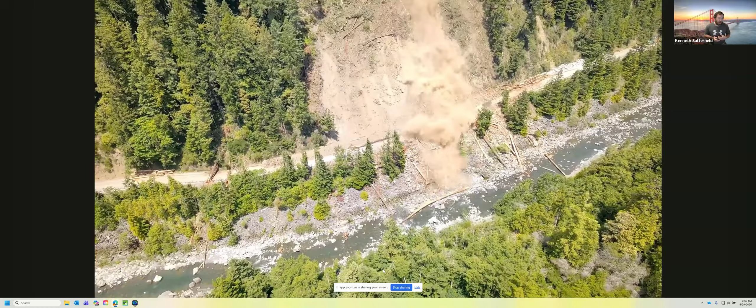So we ended up needing to do some additional work to try and get this safe enough for our geotech staff to go up. We actually hired out a helicopter logger and had that area scrubbed, pulled trees down in that area. I had the luxury of monitoring that site and showing that tree fall.

With our scan that we did, we were only able to collect to visual line of sight under part 107. So we were unable to collect the additional scarping that's about 800 to 1,000 feet up the slope, which led us to hiring out helicopter LiDAR.

We were able to schedule that through Frontier and have that turned around in about a week, so that way we could get out on site and work with the temporary restoration to try and get one lane of traffic going back through here. This had the road closed for about 2 to 3 weeks while we were trying to get this safe enough for people and traffic to work underneath.

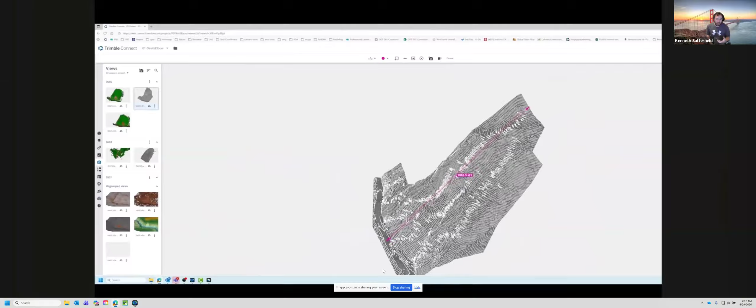After we completed this scan, we also loaded this up into Trimble Connect, and that's how this was passed along to our geotech for initial scarp review to see if we collected sufficient data. We collected about 1 square mile of LiDAR data in about 20 minutes.

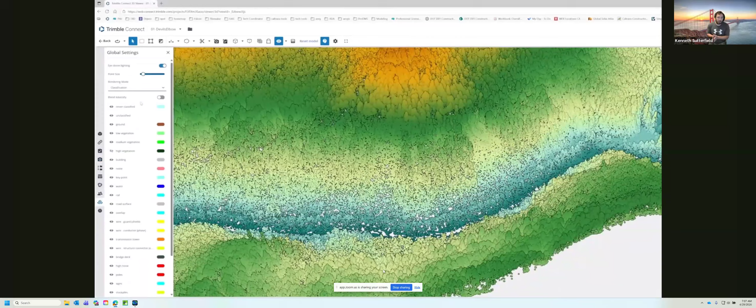This was handed over to our survey teams, and our survey teams were able to go through and do their normal extraction process and provide that to the geotech for full evaluation for design considerations. So not only did Connect help us get this as an immediate review, but it also helped us transfer this large data set from the vendor to the geotech, to the surveyors, and to construction to be able to review all the information and to work with it as needed.

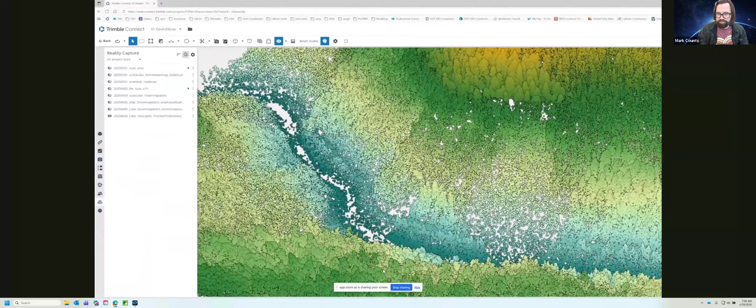Hey Ken, this is Mark Counts. So I think one of the things that we're finding powerful about Trimble Connect—why don't you tell our audience, our geotech team, how versed are they in using the Trimble ecosystem?

So most of our staff members don't even have a computer that can run most of the Trimble ecosystem. So they don't even have a computer that can run TBC. So if they wanted to load a point cloud and they wanted to operate this, they wouldn't have the technical capabilities or the hardware to be able to do this.

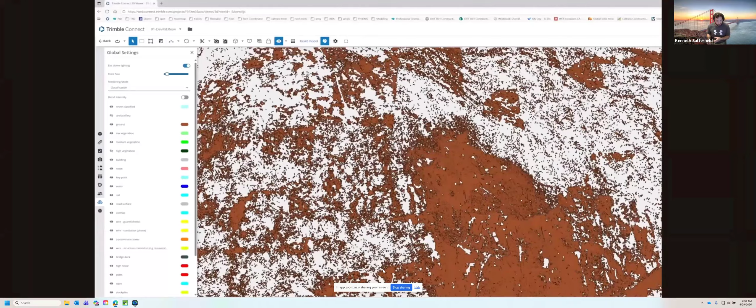So now the Trimble Reality Capture Professional Services, Trimble Connect, is actually democratizing this information to where it doesn't have to be processed down to where they can actually utilize it on the equipment that they have. So this has given us new deliverable prospects on how to get this information out.

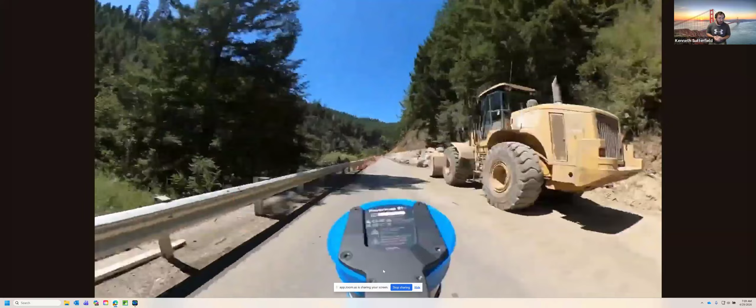And it's been multimodal. So we've been able to take these scanners, like in this particular case what you're seeing now, we took a Hovermap out and did a scan as essentially a mini MTLS and ran this back and forth to be able to get some basic information to try and keep track on this site.

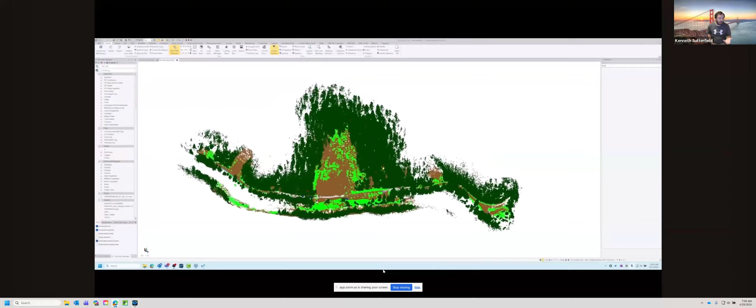All of this is loaded through that same workflow of passing it to our survey teams to get information to our designers and continuing through that workflow. Any georeferencing we're doing, our surveyors are coming out and setting the targets for it. In this particular case, we blended an aerial LiDAR flight with a ground-based vehicle LiDAR collection to be able to collect information about that.

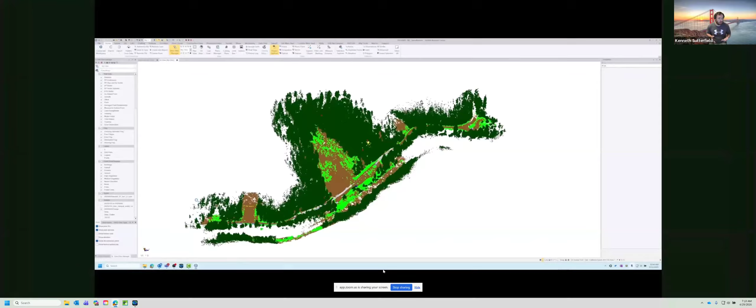The issue that we had at this location, and the partnership that we had with our surveyors, is there's very little diversity in this site. So trying to get control out was very difficult because it's all in the redwood forest. We can't get targets outside of that linear path of the roadway. So trying to find enough control that we can actually work with was difficult.

So that was one of the other partnering things that we did. We used Trimble Connect to help us see the site and try and come up with an aerial target plan that would be useful for surveys when they're requested to come out and do their work, and for construction to be able to continue to do regular movement monitoring.

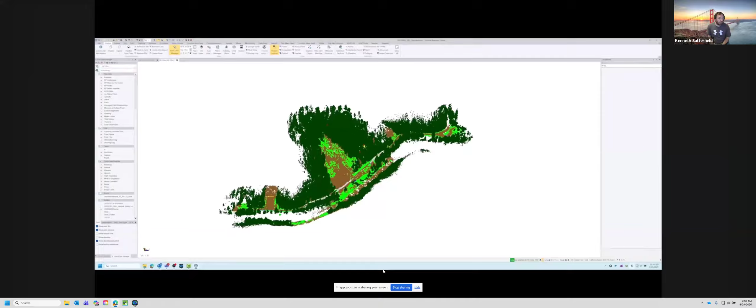I think, in case there's any surveyors on the call, let's address the elephant in the room here.

Sharing point cloud data with engineers, or even more challenging, non-engineer professions, is tricky. That's one of the things we love about Trimble Connect—beyond democratizing the data, it provides comfort to the geospatial professional at Caltrans, the surveyor, because once it's in Trimble Connect, it's a great viewer but alleviates concerns about misuse. That's a common concern for surveyors: if I share this point cloud data with someone not used to it, they might misuse it. Trimble Connect prevents all of that, doesn't it?

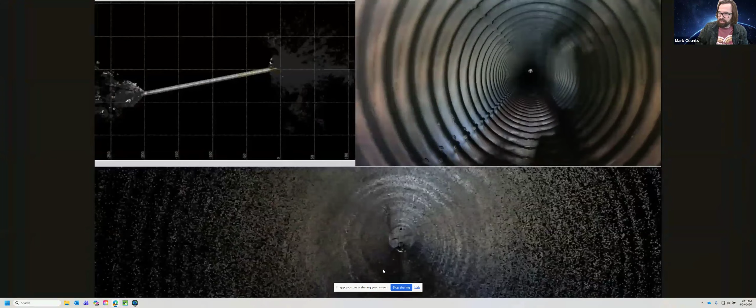Yes, because we're able to set access and download controls, and those restriction controls are getting more and more adept as time goes on.

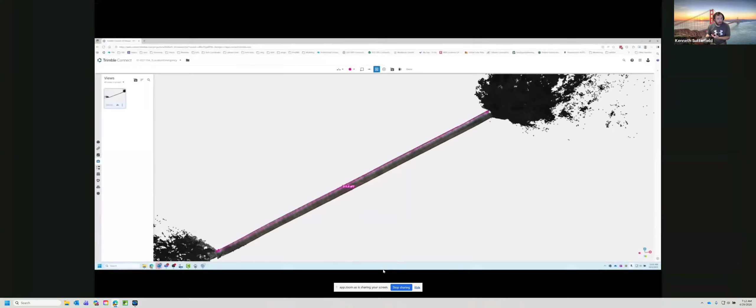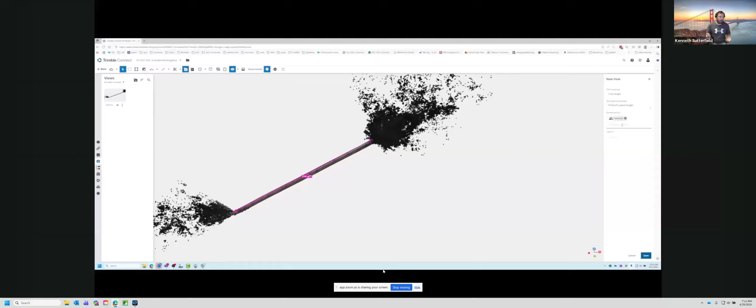With that being said, we have another example of how we've used Connect for culvert point clouds and data we weren't previously able to collect. That's been a major partnership with our surveyors, who go out and set control so we can georeference the scan off of. Since we have SLAM scanners and the terrestrial quadruped robot we can send down there to keep people out of it, we're now able to pair those two skill sets together and collect information we previously weren't able to.

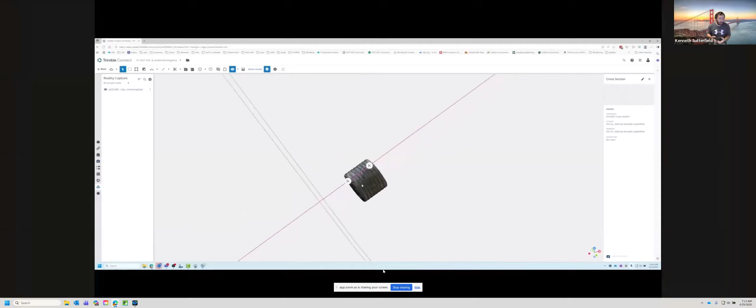One issue with this particular site was that the outlet wasn't accessible, but the inlet was. So we were still able to get length information, diameters, and condition of the pipe from one side, and get that onto plan sets for this emergency situation—all because we worked as a team. This was produced and handed to the engineers the same day, so they could look at it, pull the diameters, and check the condition, because this pipe was being considered for a liner.

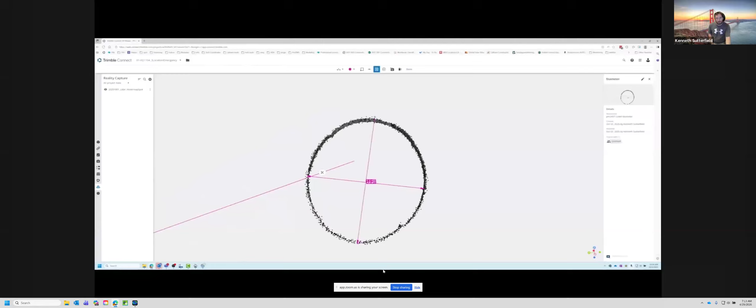That's been one of the big things we've used Connect for, to showcase evaluation. This is exactly how these point clouds are used, to take basic measurements you'd normally go out there, crawl through, and take a tape measure for. Instead, we're now able to use Connect to take the person out of the hazardous site, send a robot instead, and use it the same conventional way—to take essential measurements with a roller wheel, tape measure, or similar.

This can then be reused in the design phase—at least at Caltrans, for the surveyors to do their extractions and provide those to the designers with the level of scrutiny needed for reassurance that it's accurate.

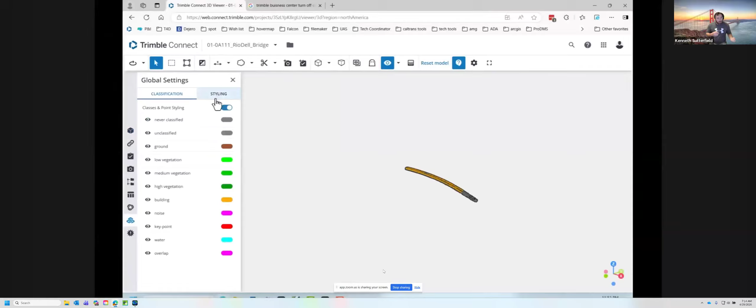Same thing here—we utilized Trimble Connect and robotic inspections to inspect the inside of bridge cells. We had a bridge replacement job where they had to remove utilities because they were changing the bridge type and no longer allowing natural gas to go through it. PG&E did their preemptive work and came back and told Caltrans staff that access was fairly poor in there.

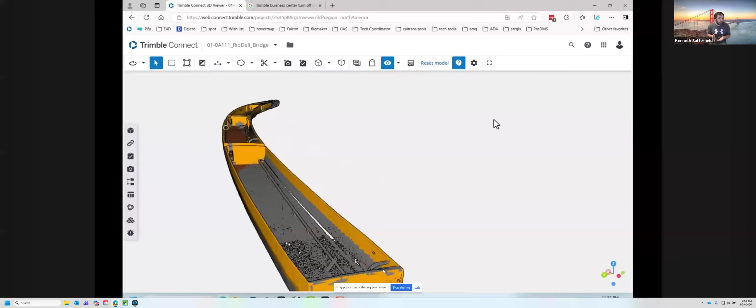As part of the design process for removing that utility conduit, we had to determine whether there was sufficient access. What happened was the lost deck used for forming and pouring the concrete had been stripped in the first two bays and pulled out by unsheltered individuals and used for firewood. However, in the third and fourth cells, they had stripped the lost deck but left it scattered all over the utility.

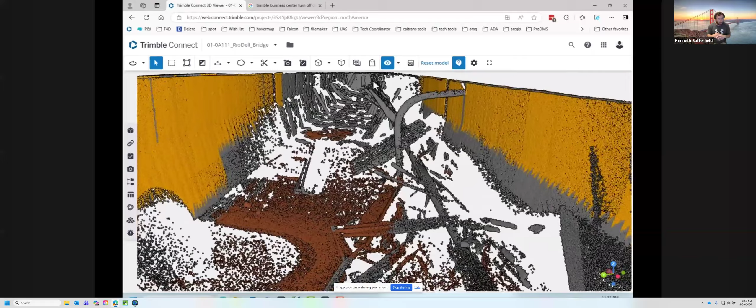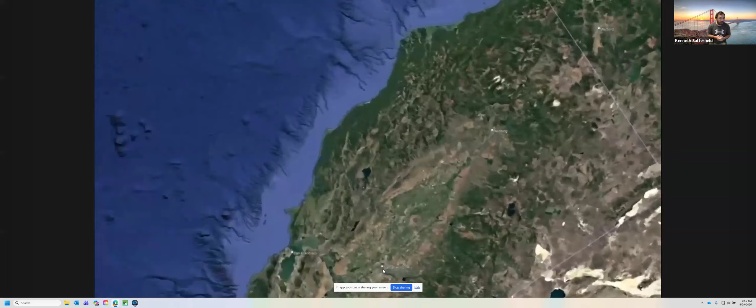So we were able to determine, without having to enter and get our confined space entry permits and do all the atmospheric testing, that we wouldn't be able to quantify this, and that we'd have to add additional funding to the contingency of that job to cover the extra work.

So another one of the use cases here, this was actually the first test case we had for using our Boston Dynamics Spot with the Hovermap to scan an area. We had a major sinkhole develop on US 101, and we were unsure of the location of the pipe in relation to a cut slope on the left-hand side. We were worried about destabilization from the excavation causing additional problems with the stability of the slope. We were also concerned with the depth of the pipe to make sure we didn't need engineered shoring.

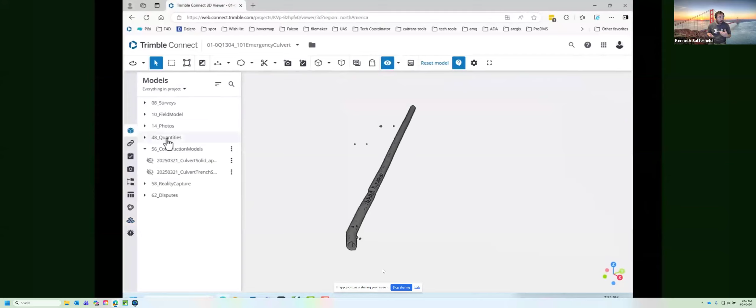So we were able to scan this and reference it from the work that surveys had done, but we weren't able to get alignment because of a buried dog leg. So surveys wasn't able to accurately determine center line above that without entering the pipe.

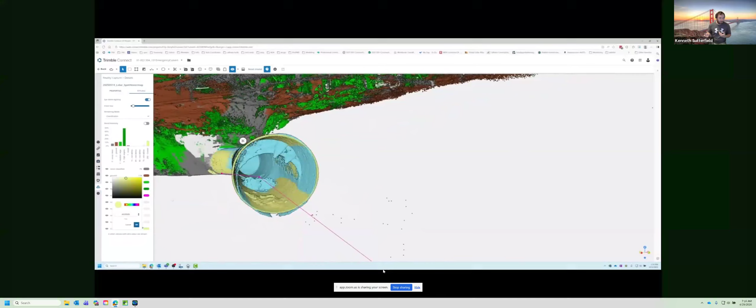So that's where this pairing came together, and we were able to showcase using the tunneling module and the issues with the pipe. We were also able to use the utility modules within TBC to model the required excavation, and we determined that we had roughly about a foot of spare room between the cut slope, the toe of the slope, and where the excavation was going to be.

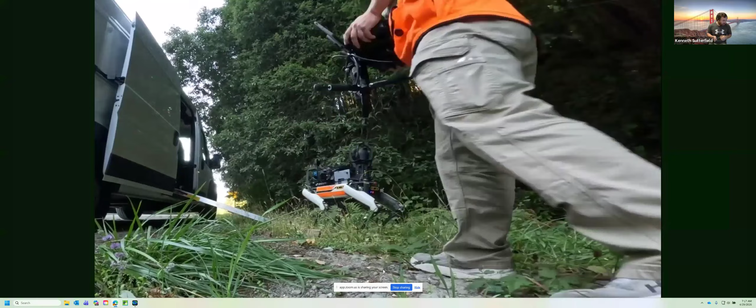And then we were able to do our as-built scan as well and reference the two of those together to show the difference between the replaced pipe and the originally failed pipe. So this was one of our first successes in using this system and showcasing that.

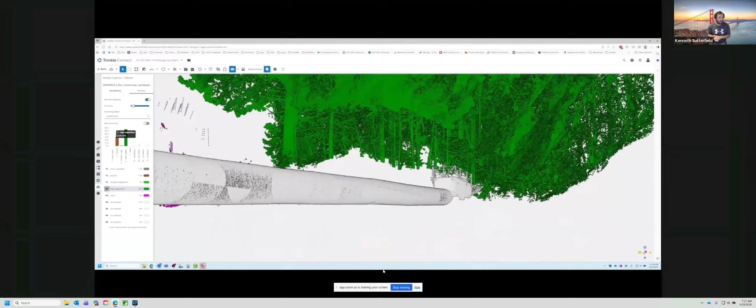We're looking at potentially continuing to use this as part of our asset management, where now we can store these tunneling module analyses of how true and round the culvert is and compare that from year to year, so we can do a subsequent scan and see if there's any new deviation in the pipe. Because one of the things we always run into with any culvert is they're not put in perfectly straight. So when you come back out five years later and it's a different person, you're always wondering, was that bend always in that pipe? Was that bow always there? Was that how we installed it? So now being able to store this, share this, and evaluate it with the tools available to us in the Trimble suite, we have a new way of assessing the health of our culverts.

So Ken, what do you mean by that when you say tunneling module? So tunneling module is an additional function within Trimble Business Center. It's not part of the normal suite.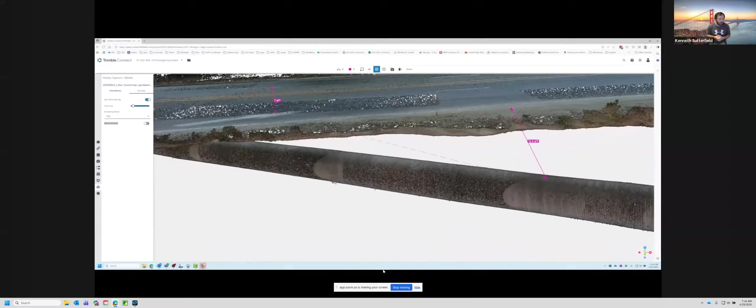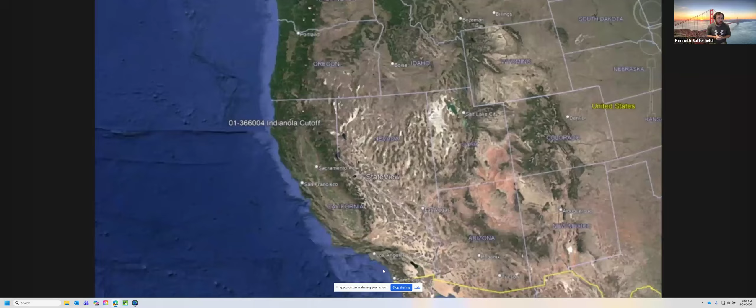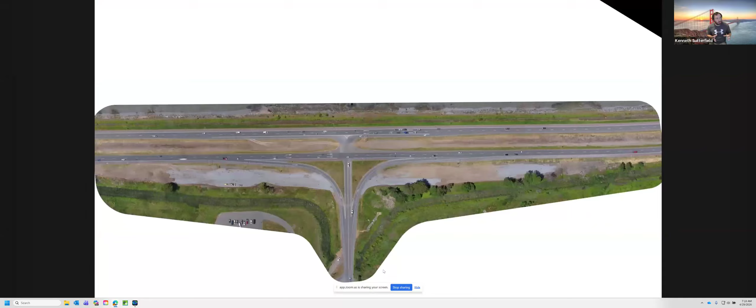They have the additional tunneling licenses, which is meant for the mining industry, which I believe Albert's going to cover towards the end when he's talking about it. But that adds additional tools that allow you to do analysis on tunnel shapes. The big one we're looking at with that is we can do a deviation analysis to see how true the culvert was installed, and we can look and see how round and true any cross section along that is.

Beautiful. So now we're moving on to some of our more regular bid projects here, where we're stepping away from the robotic inspections as much. This is where we were using Trimble Connect to bridge our field work and our discussions with the contractors. This particular job is putting an above-grade interchange in with an expanded polystyrene fill, lightweight fill.

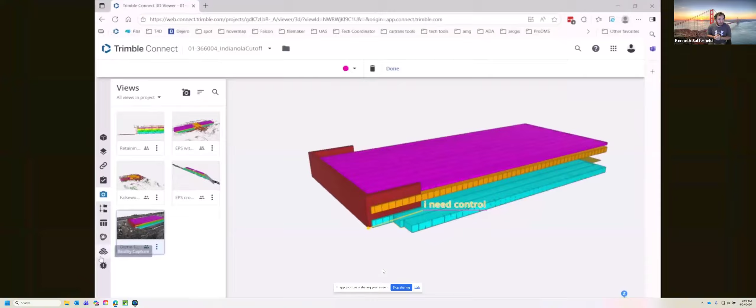Because of the bay mud, we couldn't have that much weight, so there's roughly 5,000 micropiles in a pile cap that goes underneath the EPS blocks. One of the discussions we had to have with the contractor was, how were these blocks laid out?

So part of what we did is we went into Trimble Business Center and used the ANZ toolbox to model all 5,000 EPS blocks and how they interlock together, as an example of what we were expecting to see from them. We shared this view with the contractors so they could have an idea of what our expectations were, so we could continue to have a more productive discussion on what their means and methods was going to be and what the acceptable overlaps and specialty cuts were.

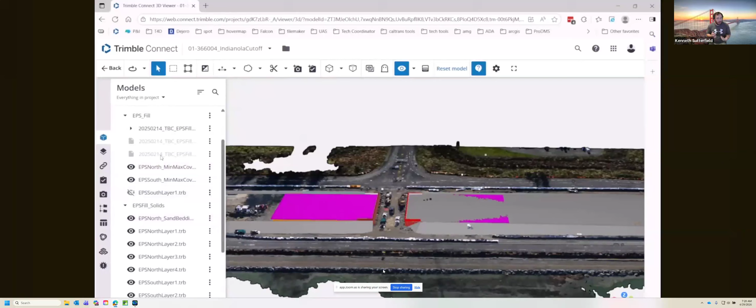We were also able to check and evaluate the minimum and maximum coverage requirements that were called out in the plans, and have a discussion with the designer when we found some discrepancies there.

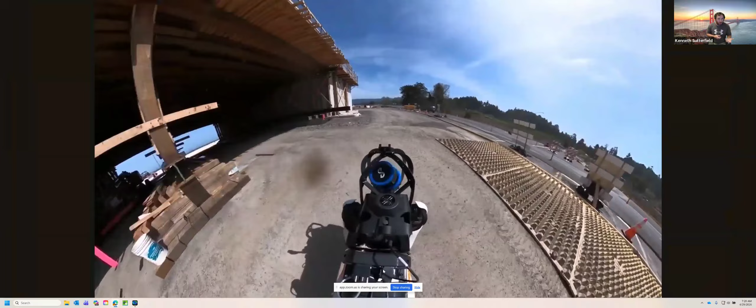Then once they had started work on the overpass, we were able to do a falsework inspection with a robotic platform, the same Spot Hover Map system we were using for our culvert inspections, to be able to do a scan of this without ever having to cross underneath the falsework, keeping ourselves out of that.

And we used the monuments left by surveys to be able to georeference that to our model, which you'll be able to see here in a little bit. The benefit of this is we were able to keep staff out of unnecessary inspection where there's some hazards. While this one had been poured in the use case where we were testing this out, it would normally be during a pour, which would be a much more hazardous time frame.

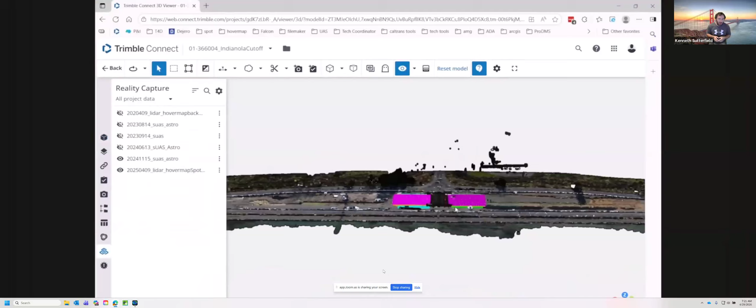As you can see, I believe this job was with Granite, and they were very grateful to have additional visualization and discussion. Originally in this plan, the only information given for how to lay out the EPS blocks was two plan sheets with two different cross-section views, and they didn't discuss how overlapping or any of that worked.

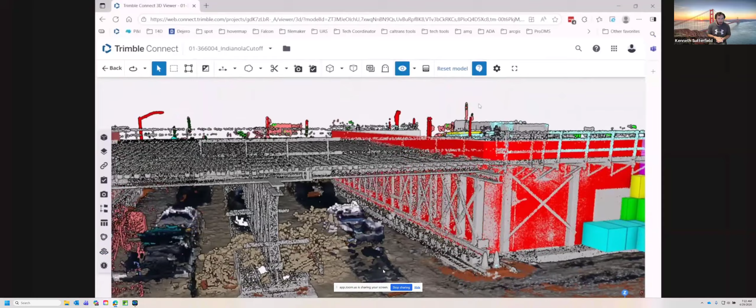So going back to that false work scan, we were able to have that referenced and then load that in against the models we had created through ANZ Toolbox, to look at how well the model was referenced and how well it fit the expected shape and sizing of that wing wall.

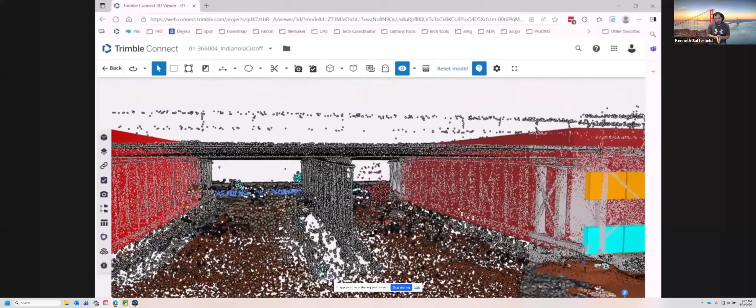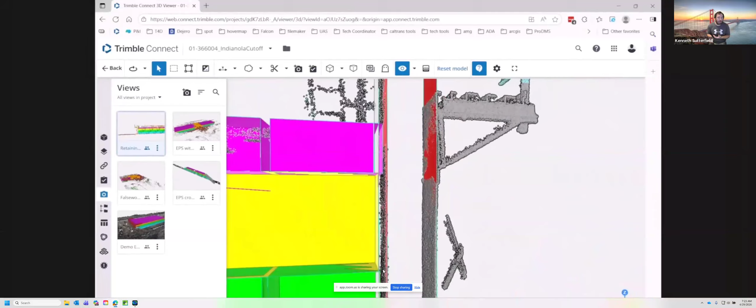We're able to share this, of course, with our structures reps, our structures inspection, and our structural representatives. Here in just a moment, you'll see that we're able to cut cross sections and look at this. One of the really neat things about Connect is you can curate a view for somebody and share that with them so Connect can jump them straight to what they need to see. In this case, what I prepared for the staff on site was this cross-section view that showcased just how well we were able to reference that scan and how well it tied in with the expected wing walls that were modeled using the ANZ toolbox.

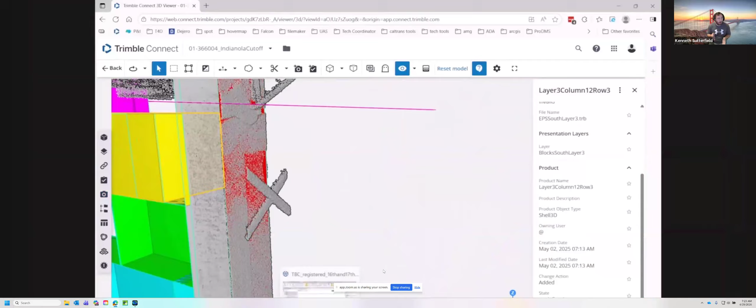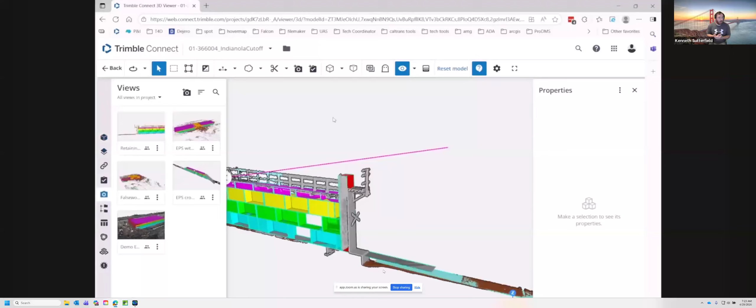This particular job was not a BIM Variety job where we had 3D models. In fact, the big use case for Connect on this job was that we were having to remodel the job as we went, because there were some critical flaws in the original bid project. So we had a designer working full-time on this job along with the contractor and myself, to get updates out within a couple of weeks as things were identified ahead of time, get those delivered to the contractor via Trimble Connect, and then they would go out, do their analysis, and provide feedback on their means and methods or issues.

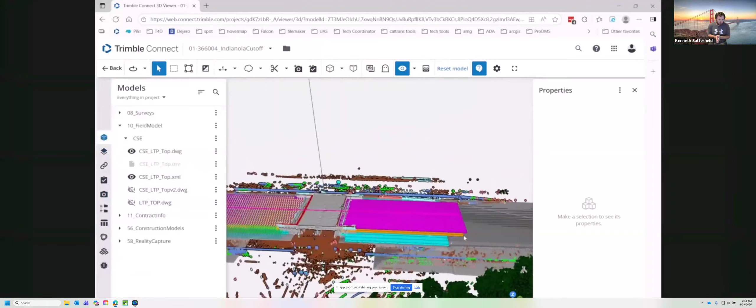And we were able to do tweaks and updates to try and keep this project going. If we didn't have that capability, and we found these issues as we ran into them, we would have had at least 3 stop works where we'd have had to go back, redesign, and then give the contractor information. Whereas with this new workflow, where we're able to visualize and work together and pass information freely back and forth, we had 0 stop works on this job.

So another benefit we had with Trimble Connect on this one is we were delivering files to Trimble Access via the connected workflow. And we were actually able to catch a control bust that was set by the consultant project surveyors compared to the Caltrans control network that was out there. There's roughly a 2/10 bust.

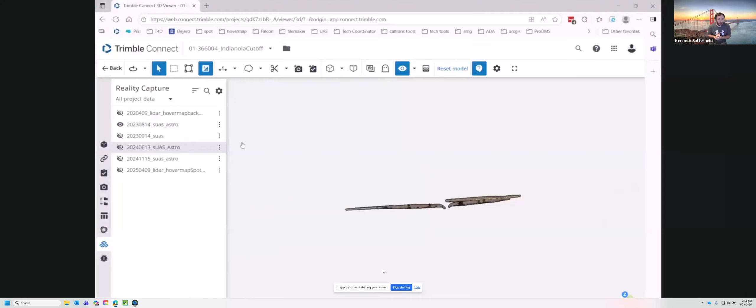Our workflow with that, and our partnership with our survey crews, is they come out and give us site calibrations to work with so we can do our inspections. So when that inspector was out on site and he couldn't check in, they ended up putting in a request to our surveyors to come back out and check that. And that's when we were able to find the error before we had put in all 5,000 piles with that incorrect data, which would have had those 2/10 off from where they were supposed to be.

Yeah, that might have saved you a little bit of money, huh?

Yeah, I think between catching that and the stage construction that didn't fit from the back and forth with the contractor, we anticipate we saved somewhere around $1.5 to $2 million on this contract.

It's pretty incredible what happens when you bring all the data together, right, and allow more people access to it, and then you can actually work through it together. Roughly about 10% of the total cost of the project was saved through adding the digitized workflow and partnering. One of the other big benefits we got from Trimble Connect is this job had a lot of reality capture, where we did UAS flights back and forth, both the contractor and Caltrans.

We would share that information back and forth through Trimble Connect and how we were doing our earthwork quantities. One of the big things we had as a benefit in this project was when we had quantity disputes, we would be coming in to talk about the numbers and how that worked out. So it changed the conversation from 'this is what I got, this is what you got' to 'here's what we collected and what does it mean.' In a lot of cases, we might be off by 4,000 yards compared to each other.

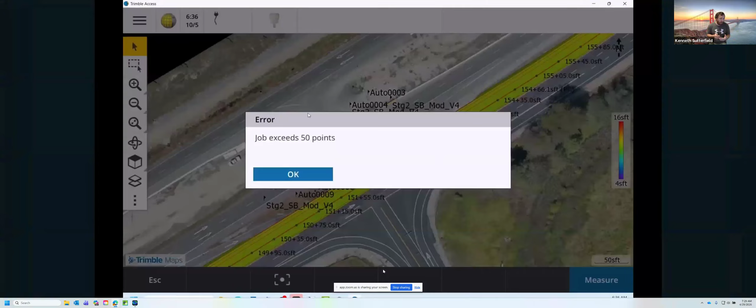We were able to pull that information back onto another data collector, or in the case of the designer that was constantly working on this, they were able to get field data in to review how that was working with their design and see if there were any issues there. And then if they found any discrepancies that they would need to take into their design, they would put in a survey request to get the design grade information from our survey crews.

So that's one of the big things we were able to utilize Access, Connect, and all of that for—we were able to get preliminary information to investigate whether the next stage of the design was going to have issues, and request that additional information.

This particular job site had the MTLS, the mobile terrestrial lidar scanner, come out a couple of times to get updated information because we have subsidence in this area, since we're right on a coastal bay. We had to get new tie-ins because we were finding that what worked a couple of years ago had subsided 2 or 3 tenths, and now we needed new models to help work on those tie-ins.

So what you're seeing here is some of the field data that we were pulling in and the information that came from that. There's a handful of inspections that were done.

Right now, we currently separate out our field surveyors' work from our engineers' work, and we're looking forward to being able to aggregate that together and have the security there where we can be confident that all of that information could be there—where if the surveyors miss something, they might be able to go over to the engineer side, pull that information up, do their post-processing on that, and then deliver that information right back to our data collectors versus having to do a passover. I think we're getting close to that, but we've still got to work on Caltrans's end on building that comfort level and building the workflows around that.

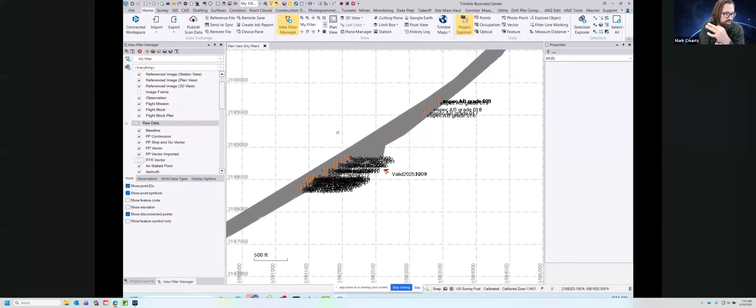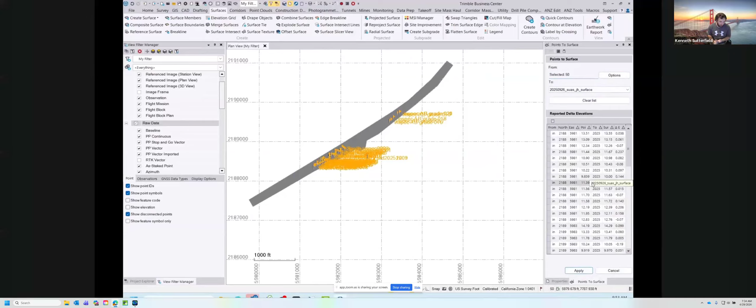Next question, this was back on the culvert stuff. What equipment were you using for the culvert and bridge cells? It's a three-part question, so that's part one. The culvert and bridge cells utilize the Boston Dynamics Spot as the terrestrial robot to do the robotic inspection, with an Emesent Hovermap doing the reality capture on that robotic platform. That's the same for the culverts and the bridge cells, both of those are the same. Depending on access, we may end up with just the Hovermap being used if it's too small or too confined a space for the robotic platform to work. We've done things like zip line or put it in a cage and do a downhole scan, those sorts of things, so it's kind of dependent on that.

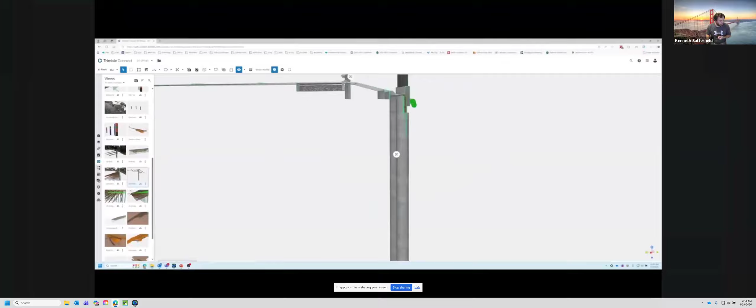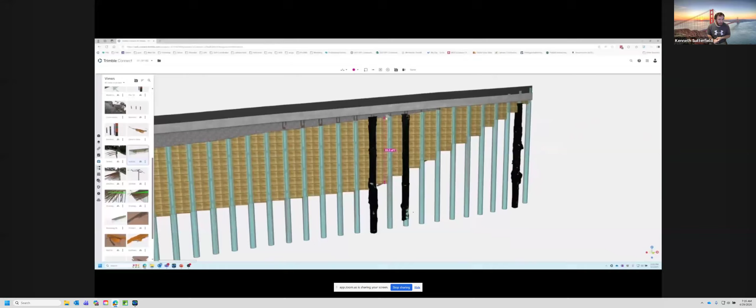Second part of that question: how does the trajectory work without control inside those areas? The SLAM algorithms seem to do a pretty good job of keeping track of it with the IMU and the point cloud processing, we've had really good luck with that. Occasionally, if there's some stumbling or a roll situation, we might have to rescan if we get a SLAM skip, but I've yet to have that issue inside of the culvert so far.

Awesome, maybe jump back to the video here. We've got a few more questions, we'll save this for later.

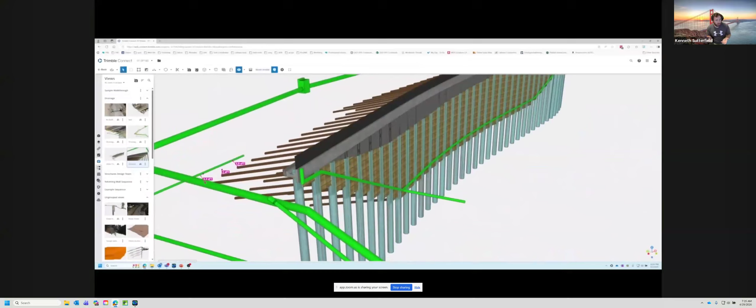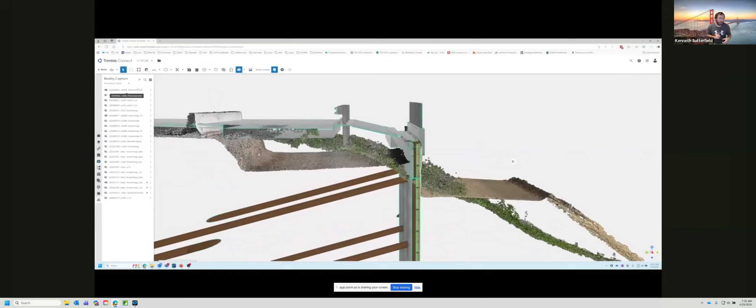So this is the first BIM for I project we did in District 1. This was an emergency contract slip out, and we had a full model of the structure, a full model of the roadway, and we also had our geotechnical bore logs. We were able to take reality captures regularly throughout the life of the project, utilizing control continuously maintained by surveys. They had to come out every couple of weeks because all of the control was having to be put in the work site, so it was regularly obliterated based on the workflows at hand. We can see one stage of the scan when they were working on the first row of tiebacks, and another scan on the third layer, and we can continue to look and do volumetrics off of that.

While we wouldn't be able to do those in Connect, we could easily use the connected workflow and pull this information into TBC to do that.

One of the other things we had is there was a lot of relocation that happened. In green is the as-designed culvert system, and then we had to move that back due to additional slip out on the inboard side, so they moved the drainage system in. That's the as-built from GNSS collected data that was fed back into this model, so we can continue to use it for clash detection and awareness when doing any other work. Some of the other things you're seeing here is we're able to make notes on this three-dimensional space that stays tied there, and we're able to save that view and send it to another staff member.

One of the things we needed information on from our designers and maintenance staff was to verify if that existing pipe had been abandoned or if it was still there. We had evaluated the proximity of our tiebacks to that existing underdrain and found that they were within the deviation tolerance of the drilling of those tiebacks. So we actually went back to design and adjusted the angles of those tiebacks to make sure we missed that system, and that was a major cost savings.

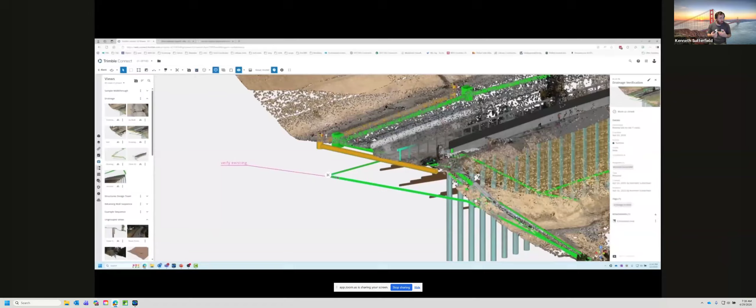Additionally, by utilizing Connect, we were able to do clash detection on the solids of the model early on. They were able to identify that the guardrail was placed over the original alignment of the drainage system because the drainage system was on the RT side of the road, and they actually redesigned that prior to getting to construction because they had identified that conflict. Typically, because of the way we do our plans, those would be on separate pages that may not be able to be laid over the top of each other because one may not be georeferenced.

Typically our layouts for guardrail are not georeferenced, and we wouldn't have seen that co-located over the top of each other. The drainage system would have been put in first, so we may have had to abandon or remove and replace that drainage system after installation if that had not been caught. On this project, with the clash detections alone, we believe we had a cost savings of around $1 million in just eliminating rework or potential conflicts.

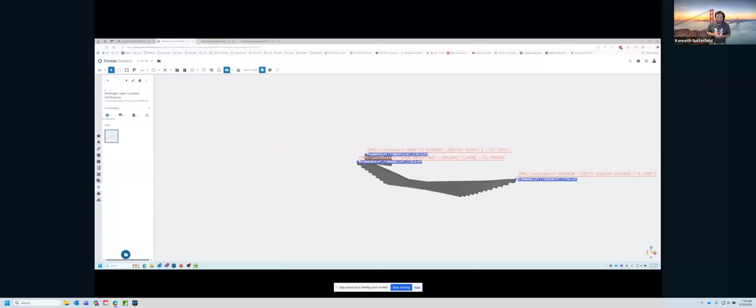The other thing we used on this project to continue discussions with the designers is we used BCF topics to save views and send information back and forth. This was really limited initial testing, but it did help us get information out to the designers. One of the issues we used this on initially was to try and determine the issues we were having with our exports from Civil 3D into the connected workspace. There's some California-specific issues we run into with the U.S. survey foot, international foot conversions.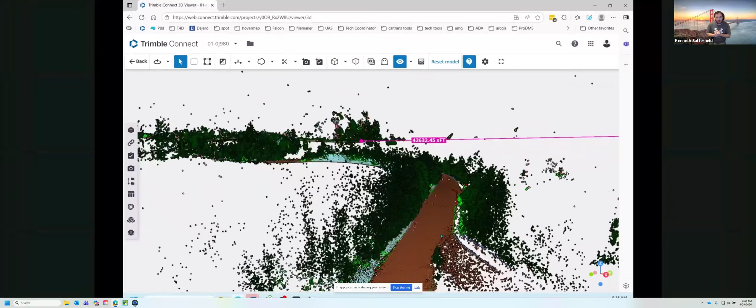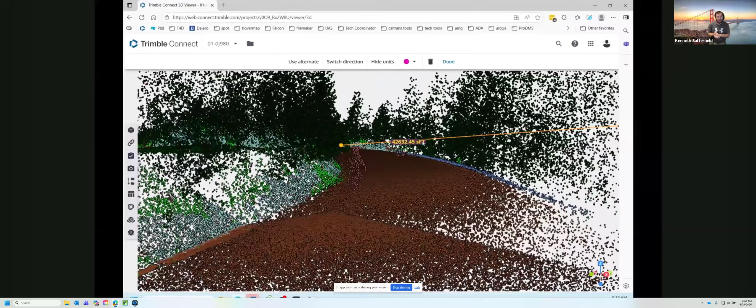What we were able to do, this one was actually put together and loaded up by our surveyors to provide to our advanced planning team so they could get rough locations of all the guardrail systems, all the sign systems, to put in their plans for quantification. Previously, the only way they were able to do that work was to drive it, stop, find the nearest culvert marker that had a post mile on it, and walk it with a wheel tape or set the odometer on their truck and drive it.

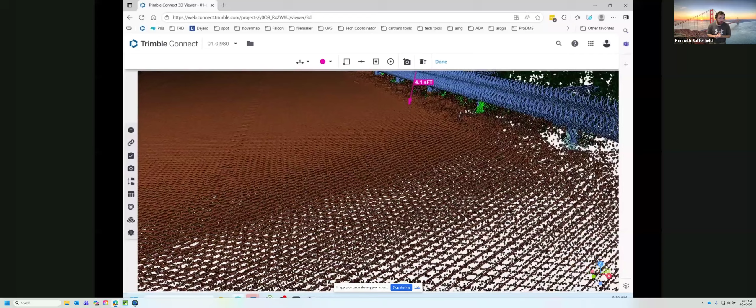Now they're able to do this without putting their boots on the ground in a hazardous situation, because in most cases our shoulders in the District 1 area are 2 foot or less. There's a lot of areas where that information is needed where they couldn't physically get without a lane closure, which when you're doing sites over 20 miles can get really expensive to try and bunny hop that for 5 minutes at a time of just gathering information.

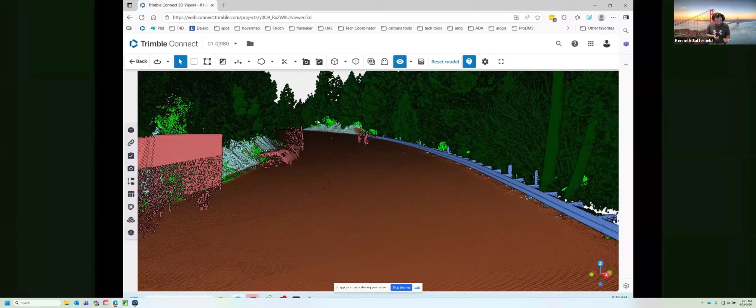One of the other side benefits we were working on showing them a workflow of is they were also able to pull guardrail heights and assess whether those needed to be replaced or adjusted as part of that contract.

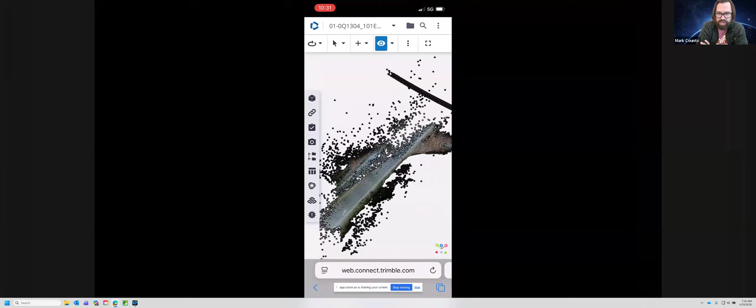I don't know on your guys' end, but I do believe that trying to gather that information and provide that as a deliverable to advanced planning and those other functional units was just untenable amounts of time. Was that correct? Yeah, and again, it's coming back to a user base that isn't really equipped to work with point clouds natively on desktop applications. So giving them access to big data sets like this in a format they can use intuitively, that doesn't overtax their hardware, that was the win.

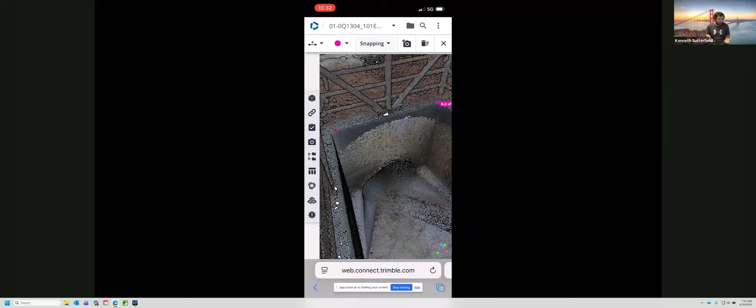Segueing from that, what you're seeing here is a recording from an iPhone 12, leveraging earlier data sets that you saw in here. I've been able to navigate and utilize point clouds on my iPhone 12, including MMS data sets, and do quick evaluations and look at that. So it really allows for any interface, any digital device to interact with these data sets instead of just high-powered desktop machines working with TBC or other point cloud processing software. You're now able to do this even in the field, do a quick check on what was this supposed to be, because you can do this with the model, the reality capture, whatever you need, and it's available on your cell phone.

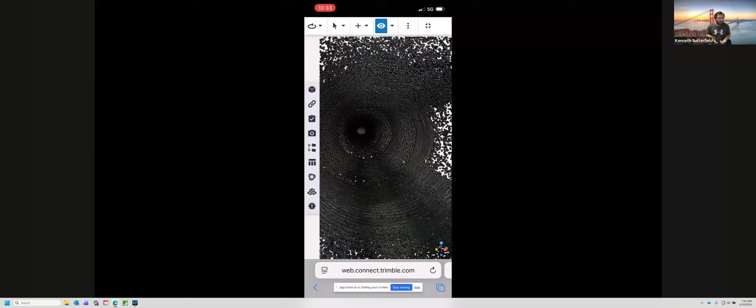I've had a handful of inspectors go through and utilize this data to do quick field checks. If they didn't have their T100 or their data collector and rover, they're able to come do quick checks on reality captures. You're also able to have that conversation with the contractor and show what you're looking for, or even with our executive staff. A lot of times I'll get a question when I'm not next to my computer that they want to know something about a project, and I can just pull up Trimble Connect and have that conversation right then and there instead of scheduling a time to come back around to it.

I think this is probably another good point for us to pick up a couple more of those questions. I think we got Nick's address, didn't we? Yeah, so the last one is from Jared. You did get a little bit of kudos from Riley, but then we've got a few questions from Jared. What data size limits does Connect have?

That's a loaded question, it depends what you're talking about. If we're talking about Trimble Connect with the licensing we have now, we don't really have any file size limits. The limitation is how do you get the file into Connect. I believe it's like a 2 GB limit for just drag and drop in the web browser. From there, you need to use one of Trimble's other tools like Trimble Sync or Trimble Mirror to get larger file sizes up there. Or in the case of Trimble Reality Capture Professional Services, you'd potentially use the publish command in TBC if you didn't have the .laz file up in Connect, where you'd convert that over.

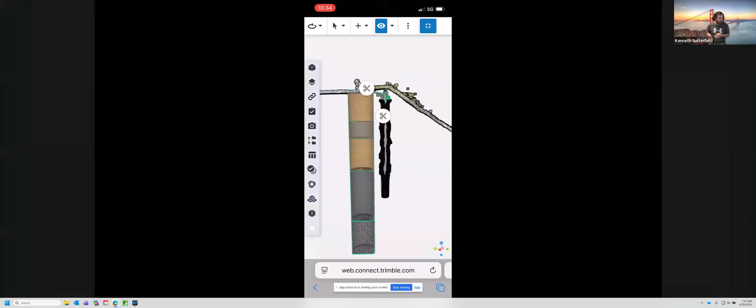As far as what we've tested in Trimble Reality Capture Professional Services, we've pushed a 20-mile MTLS data set up there that was I think 2 terabytes. We've had very good luck with it being able to ingest the information and provide that out. I have not yet tested the full capabilities of what it can do in terms of how the photospheres and everything display. We've focused just on the immediate deliverables, because even just getting the point clouds to staff that couldn't work with that reality capture data before has been such a workforce multiplier that the next step hadn't been mandatory at that point.

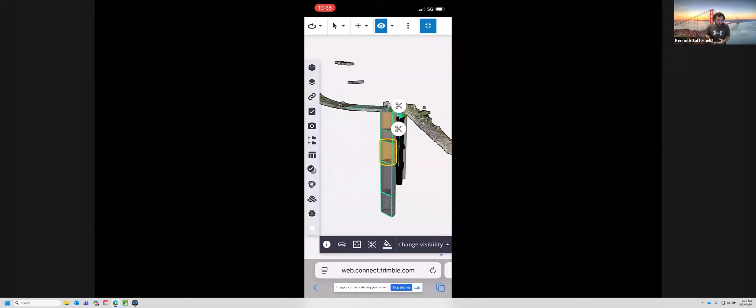We were just focusing on trying to get some of that preliminary test data out there to help alleviate some of the workflows. Right now in District 1, I believe our survey crews are 6 months behind trying to keep up with all the requests that are out there, with the amount of work we have coming through between our K phase, our early design decision phase, active design, then geotechnical concerns, and our construction concerns.

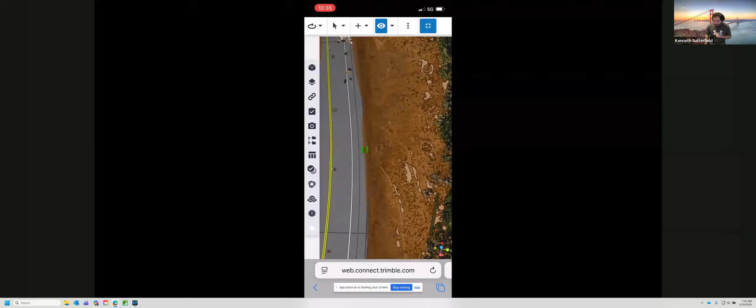So in here is kind of showcasing some of the as-builting that we had done on the Bridgeville job. This is on Highway 36. This was our first BIM for I, so as we got close to completing this project, we did more. One of the really interesting things, this one is being recorded on an iPad. And if you have your surfaces, you actually have a walk around tool on those mobile devices where you can actually walk through the project.

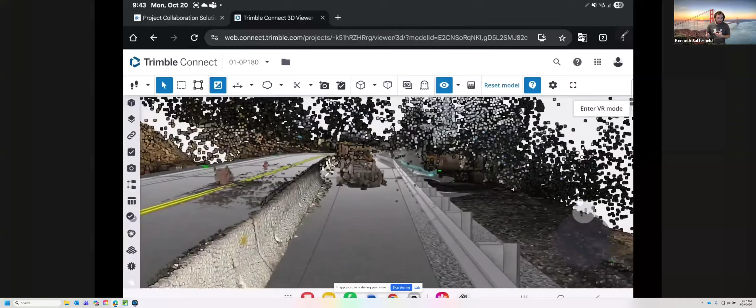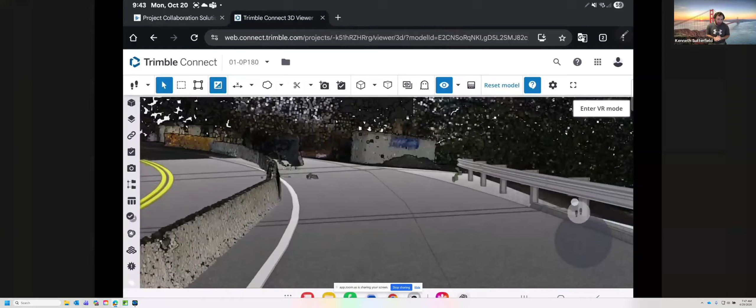If you're trying to showcase with maybe a third party, like one of the permitting agencies, you can have your georeferenced point cloud with your model and actually walk through how it's going to look, giving people something more tangible than just a couple of plan sheets that you need to be educated on to really grasp. This was another unique application of being able to showcase how we use that.

And even if you don't have the surface for the tool to snap to, you can still aim and navigate through that free space and still kind of walk your way through that. It's not quite as natural as having a surface to snap to, but it was also very effective.

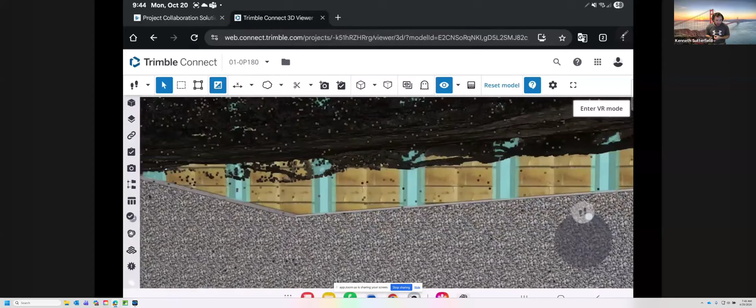Yeah, and then I'm looking at the point cloud, those points are kind of big. Is there a way to control the way you visualize your point cloud? Yes. In this particular case, because I had some sparse data, as this particular collection was a test data set, I hadn't done a full cross-hatching to make sure I had good coverage. It was just to test the new system I was working with.

So you do have visualization control over that information. You can determine whether you want to look at it from an RGB standpoint, from your classified standpoint, or intensity standpoint. Those are all options that you have available in Connect to look at your point cloud reality captures.

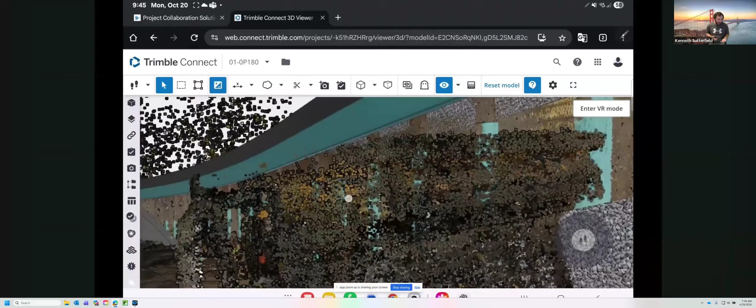And then, of course, you have all your layer management information, so you can turn on and off layers. So on the structural model there, we can turn off the timber lagging, we can turn off the concrete piles. We could be looking at just the I-beams because that was how it was modeled, and all of that power is put in there and is available on whatever device you're connecting to the service.

Cool, at this point that was the end of the presentation that I had prepared. And so I think we've kind of covered questions as we went. Albert, was there anything else you came up with that you'd like us to touch base on with this? No, I think that was great, Ken.

Thank you so much. I think just on the MMS data sets, there is definitely a multi-pane viewer that's coming up with Connect, where you can actually view those spherical data sets or the panoramas from the mobile mapping data sets alongside the point clouds and those kind of things. So have a look at that as well. It's a functionality that's being released in Connect. You can actually do multi-pane viewer to see all your data in multiple windows, and then decide what you want to see in each of those windows, which is a nice add-on onto the Connect platform to give you more access to your data.

So no, really appreciate it. Thanks for that. It's been really good and informative. Anything else from you guys' side? Otherwise, I'll just go into the resources and get that over and done with.

I do see that another question had come in from Nick that you mentioned previously about limiting views for different people. He was asking, how do you organize and manage the permissions? Do you end up getting licenses for everyone that needs to view it? So one of the luxuries we've had about our implementation of Connect is the only named users we have are the managers of the project. And then we can add any subsequent person to that project to allow them write, read, whatever access we wanted without having to have a named user license associated with that person.